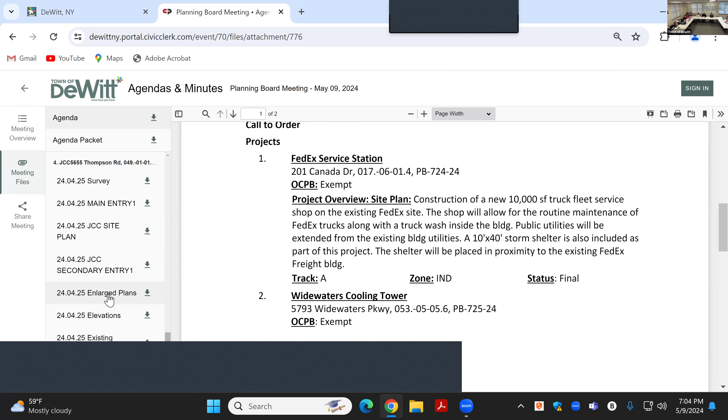Okay, alright, I'm gonna go ahead and read the motion. Well, the shelter encompasses something inside, all of the grass, but... Yes, understand. The sidewalk would be removed, and then regrassed, whatever. You wanna put it up? You guys making me short, guys, reach. You can push that table down, make it easier. There we go. Come here.

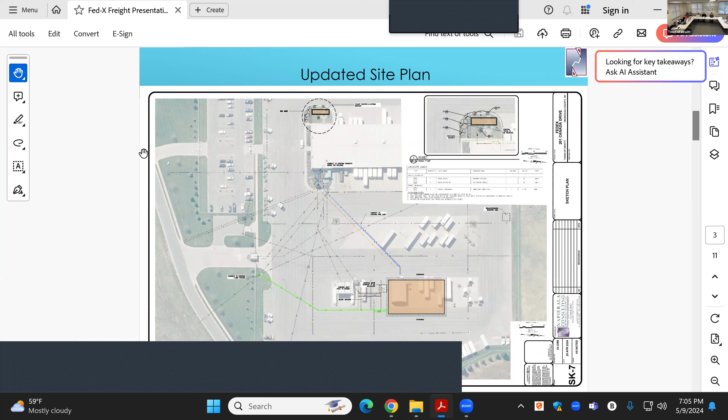Go to the PDF FedEx presentation. Yeah, that one. You can just go past that. We got introduction, and on the Zoom we do have - I saw Mike O'Brien and our architect Rob McManus from Ford Associates. So go to the next one, it'll help us. One more.

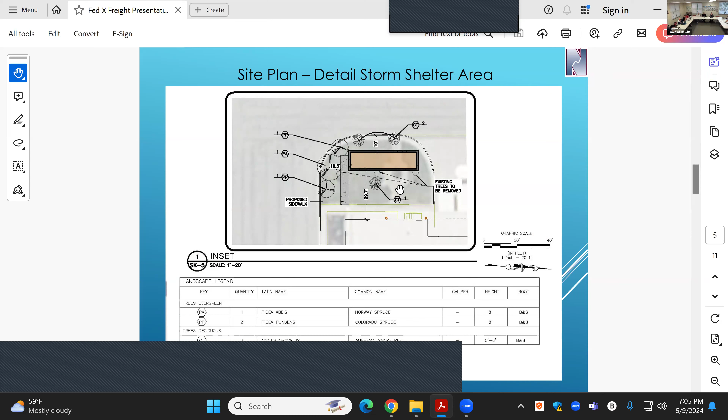Right, so you see the existing sidewalk that's under - actually, do one more because I got it blown up in good detail. So the existing sidewalk, which is over here and has a little planter area, that's going to be put back into grass, and then we have a new ramp, a new sidewalk, and the entry door to the storm shelter is here on the south side of it.

That's correct, yeah - and that sidewalk that you called out that's under the storm shelter, this is Mike O'Brien, sorry - that is actually just gravel at this time, it's not technically a sidewalk, just a gravel path. It just leads across into the asphalt area, because this is kind of like an island that separates the truck bays here to the north side, and there's no parking or anything to the north.

But the gravel will be turned into grass. And then this kind of shows that screening, where we're matching the screening that is on the east side of the terminal building.

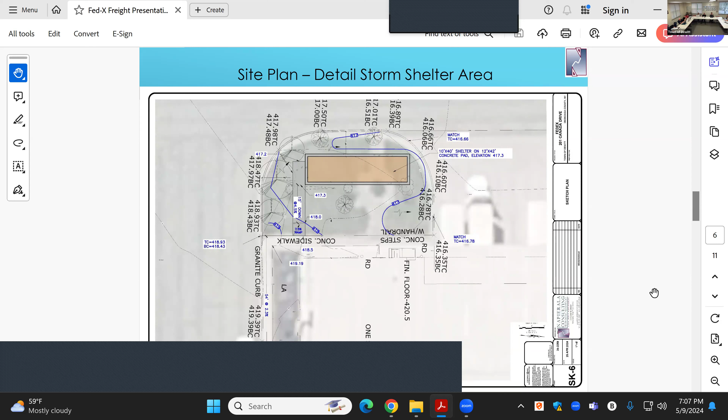Which protects and screens off the existing generators. And if we click a couple more, we got an existing picture of what those spruce trees look like, and we're trying to match those species in that tree. So this is a real life picture - we went out after the last meeting on April 23rd. So from Canada Drive, looking, you can kind of see where that FedEx - that's where the bays are. And so the storm shelter, only 10 foot high, will be in that area.

Go ahead, one more. So this is the existing screening on the east side of the building with the generator pad, and same species that are there on the east side, we're replicating that on the west side. So when you take those two pieces together from Canada Drive - and those species, based on requirements, they're gonna be planted at a 3 to 3.5 inch caliper, so they'll be a good size to start, and then they'll grow quick.

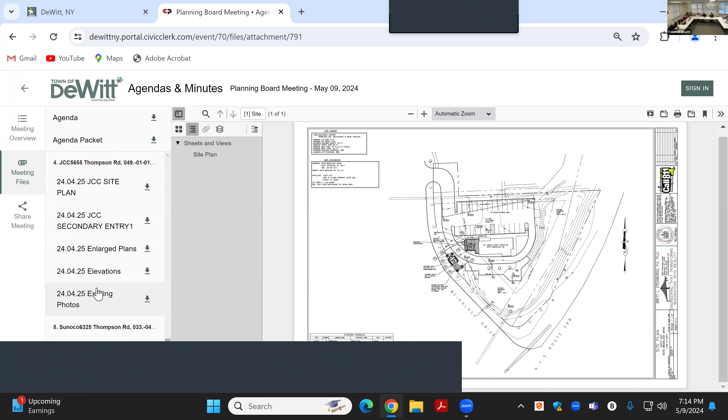Okay, up next, so we've got 2 concepts in front of us tonight. First up is going to be the JCC with Andy Ramsgard, architect for JCC.

What we're proposing is just a replacement in kind of existing pieces, the sidewalk, which is shaded in the existing locations. The main entry is on the right, and on the left is the secondary entrance. They have 2 canopies existing that are approximately 16 feet by 25 on the left.

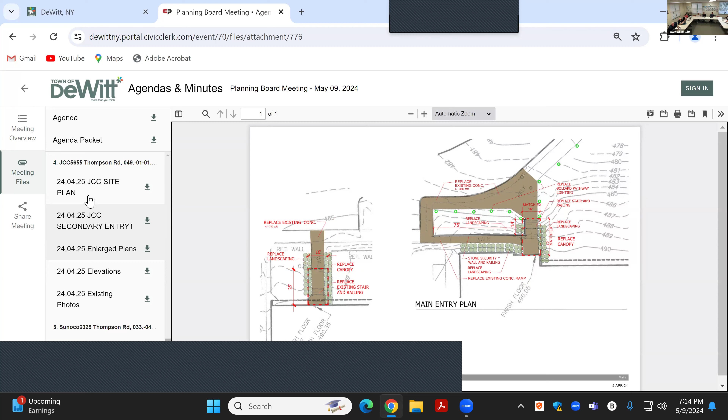We'll back out and go to the overall site plan first. Both entries are at the front of the building, which is on Thompson Road. The main JCC entry is here, and the proposed work area is highlighted with the work limit box, shown for both the first and second entry. It's a very small work area, and really we're just replacing in kind the existing structures that are there.

What we're proposing is basically a simple arch canopy, replacing the existing columns. We're going to remove the interior bearing points and just have 2 columns supporting a continuous span beam. There's a mud-in LED strip that, when the lights are off, you can't even tell the fixtures are there, and it's really just to light up the sidewalk. We're also replacing railings on all the staircases - they're all shot and rotted out at the bases, and the concrete stairs are all rotted. Very simple.

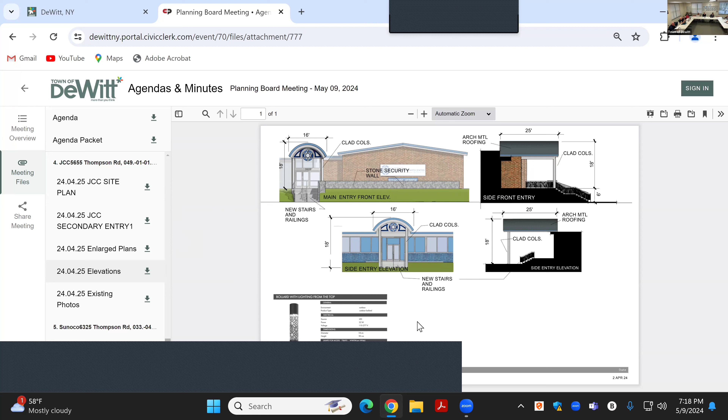So that'll also show up on the enlarged plans. We're wanting to replace the existing bollards in kind, in the same location. There are 11 that we want to replace - they're shot, the lenses are all discolored, and the bodies and bases are rotted out. So it's time, but they'll go in exactly the same spot.

Where does the canopy... I have the Google Earth map up, I'm just out of perspective. The old canopy came out, crossed the ramp zone, and flew out beyond it over the stairs. Where, in relationship to the ramp - to the sidewalk with the railing on it - does the new front canopy come out to? You're not coming out as far as the old one, correct? No, the columns go in basically the same spot because the columns are ahead of the post. We won't have a post there because the railing for the ramp is wall-mounted and goes across, with the wall sliding in behind the column.

That expresses the column and covers the landings. The sidewalk is all deteriorated, the ramp doesn't meet ADA, there's an inch and a half of frost heave. So that's it, it's really simple.

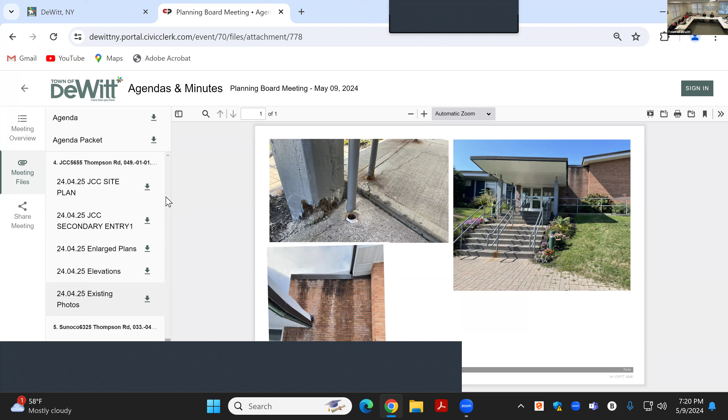So at this point, this is just a conceptual presentation, so we appreciate you updating us. For the 2 meetings, you're on Track A, correct? Yeah, Track A. So we'll get any comments back to you, and the submission date would be 2 weeks from today for the next package, in order to be on the agenda for the next HRAC meeting.

Okay, great, so we'll pull those comments together. We like this project. Yeah, this is great.

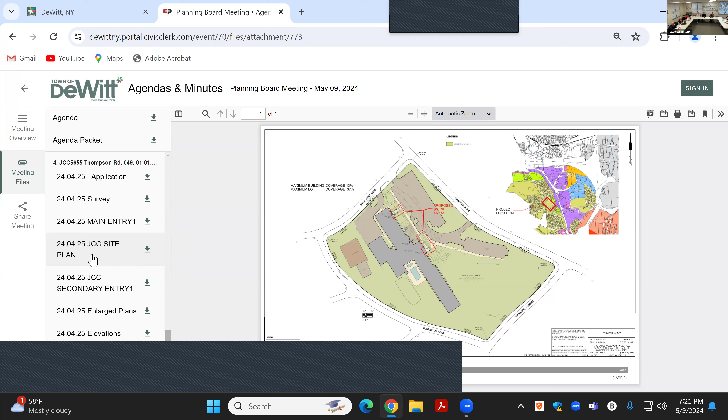Does the bollard that you're putting in have a different design? Yes, it's the submitted one. If you go back and look, it's a filigree pattern, very filtered light, creates really interesting shadows on the ground. But these are solid now, solid with a 3-inch plastic screen, so they cast light sideways. Yeah, these cast light circular, around.

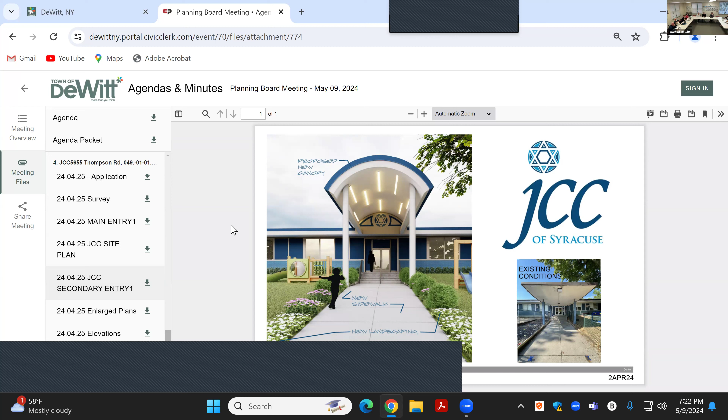Thank you. I think Doug, you made a comment when we were talking about this on Tuesday, make sure all the railings are to code. Yeah, code compliant, everything's going to match the renderings and drawings. The one that came in before was half on the bottom stair and half off, the heights were goofy.

Guard slash railing, it depends on the height or what you're trying to do. Right there, and then no extension. So it looks really low, like it's just a railing, but then it's attached in a lot of spots. Depending on how far it is off at that top part, you may have to have a guard right up to the stairs. It's all flush on top. Oh, it looks like there's a drop because of the wall you can see. But just gotta check, no, it's gonna be ADA compliant and I drew it so it complied.

Are you lighting any of those stairs? No, it's going to be in the canopy. So not that, and it has the bollards going up the side of the stairs. Oh okay, so that's what's getting lit there, here and here.

That's my question, I'm curious about that. Which question? I'm not sure what your question is about needing accessibility ADA. No, code compliance with the railing, they just didn't look as though they extended. Yeah, they have a flat extension at the end of the top.

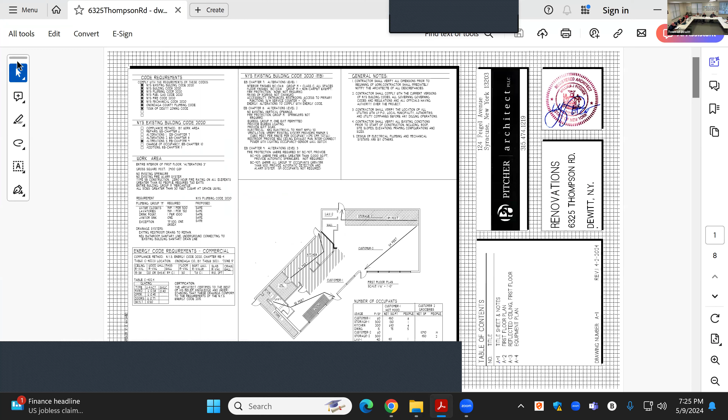Again, this is a concept presentation, so we'll do 15 minutes at most here. Bill Pitcher from Pitcher Architect representing the applicant. Let's go to the next page.

About 2 to 3 years ago, I did the original drawings for the previous owner. They got partially through and subdivided the building into 2 tenant spaces. The present owner decided he doesn't want that, so we're demolishing that interior wall and making it 1 tenant space. Basically the work is all interior: plumbing, electrical, heating.

The building really needs basically new electric lighting. The lighting wasn't code compliant before and they never finished putting it in code compliant. We're basically looking at a grocery store area here, cooler area here, kitchen and takeout food in that part of the building.

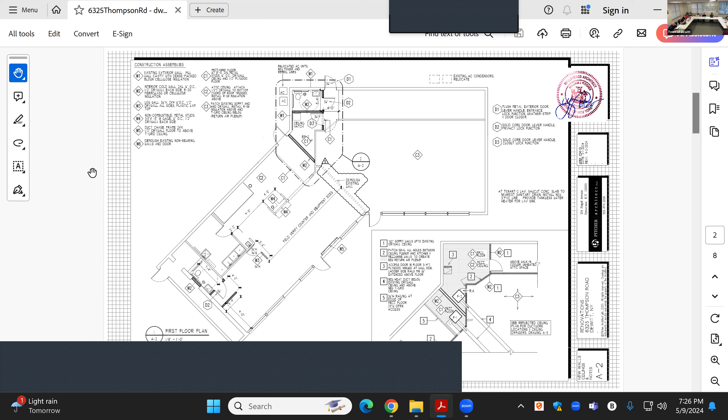Go to the next page. That's the ceiling, go to the next page. Okay, basically we're laying out some counters here, some coolers, a new restroom in the back for this area, new restroom down here, some work in the utility room, the sinks, and work on this new service line. Most of the equipment in there was in there before in terms of cooking and food and pizza, so we're doing minor repairs on the equipment.

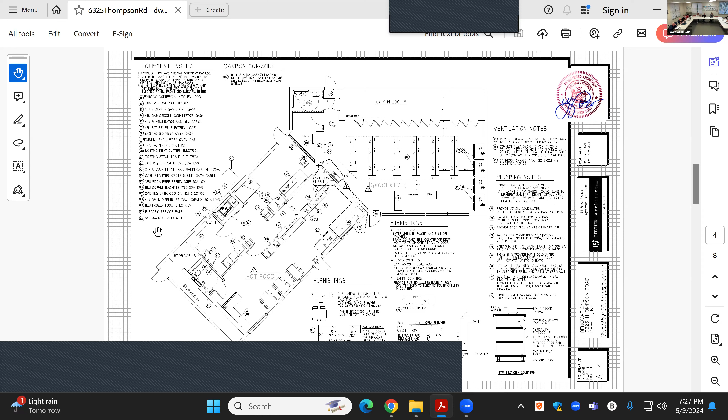Next page. On the exterior, we're not intending to do anything.

Basically, there may be some signage changes, but I don't think we need to address that at this point in time. Next page, that's the other sides of the building.

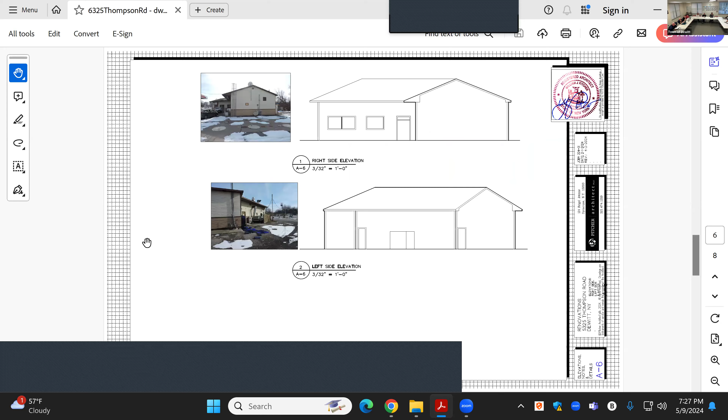So you're going to continue to be gas service? Yes, only gas, food, groceries. How long has the site been occupied? 2 to 3 years. 2 years.

Were the tanks upgraded when they had to be upgraded? Like New York state law required new safety tanks, right? Wasn't that recent? So I got double wall. There's one that was new for 2006. We're looking into the other 2 tanks now as we speak.

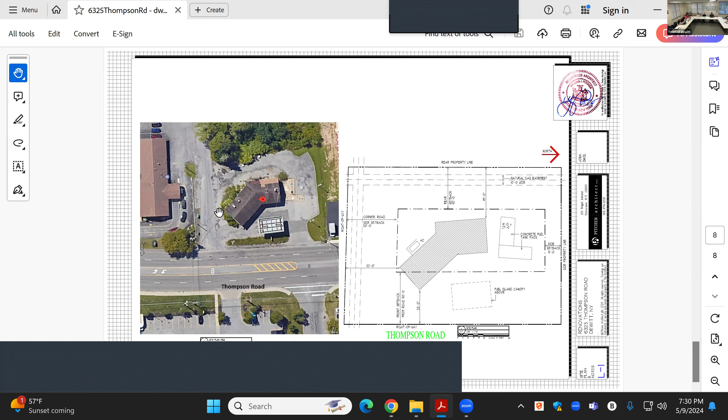I mean, we've looked at the exterior of the building, and I know you made the comment that you're not intending to touch the exterior. This site has sat vacant for an extended period of time, and the exterior definitely shows that. It will need to be brought up to town standard.

And specifically which items? Siding, windows, the whole soffit, lighting, any exterior lighting will need to be LED. Can we go back up? Okay, well.

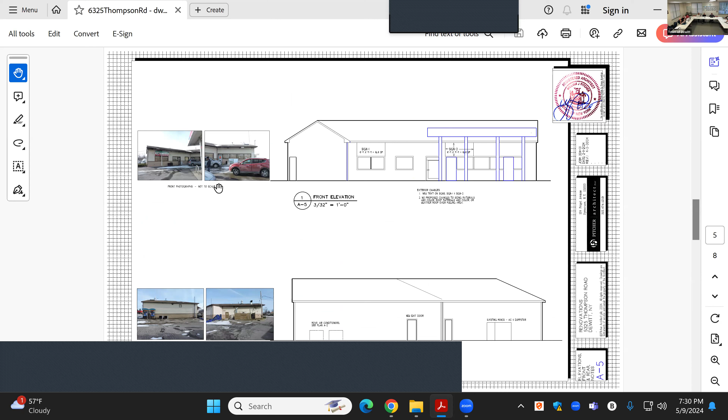Okay, that is the previous sign, that'll go away. This is just stuff behind the windows. Need maybe a new gate on the dumpster area, and around this is the air intake for the commercial. Yep, behind the fence, and that's packing crates. Yeah, if we get in, it just looks like it's in rough shape.

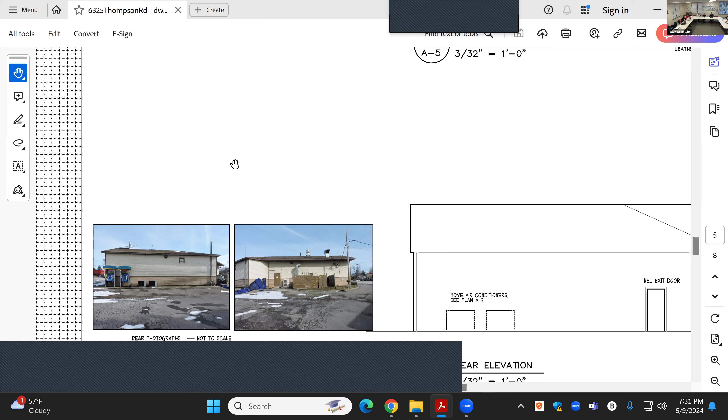The front of the site, you'd need bollards and stuff. There's no bollards at the entrances or doors to keep the cars out. Curb cuts, I think, are there. I remember that from the drawing.

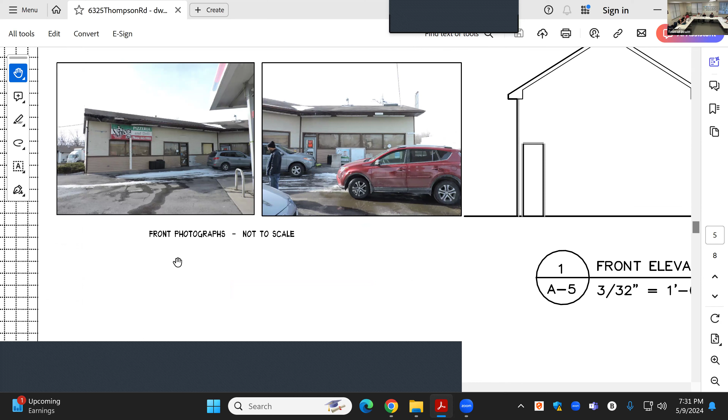I think the parking, you need to show a site plan with parking counts. This needs a full site plan package. It's not just an interior renovation at this point. I think you need to take probably a full assessment of the whole building, sidewalk to asphalt.

So we can give you comments and a checklist from the town, but there will be a significant amount of work in order to meet town standard. This is a new site plan application. The site needs to be brought up to the requirements of the town.

Has there been any coordination with DEC on the tanks at all? He said they were. Yes, we're in the process, talking to DEC as we speak now, just recently.